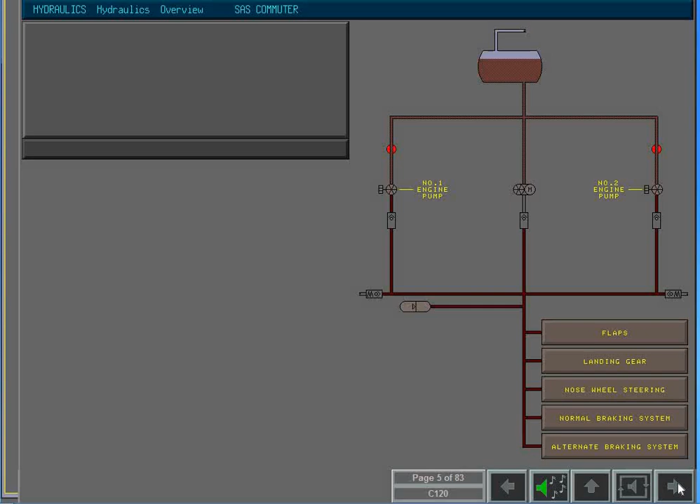The Fokker 50 is equipped with a single hydraulic system. The hydraulic system is pressurized to 3,000 pounds per square inch by 2 engine-driven pumps. The hydraulic system supplies hydraulic power to the flaps, the landing gear, the nose wheel steering, the normal braking system, and the alternate braking system.

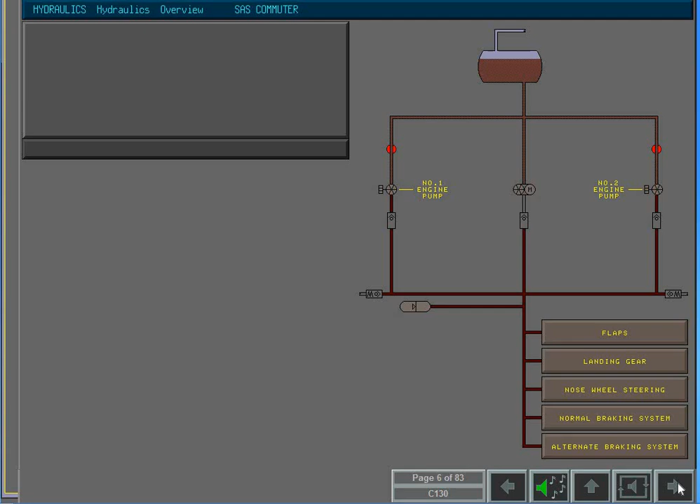The hydraulic fluid used is to specification MIL-H-5606. This fluid is red in color, fire resistant, and has an operating temperature range from -54 degrees Celsius to 135 degrees Celsius.

The engine-driven pumps are located on the propeller reduction gearboxes, the left engine-driven pump on the left gearbox, and the right engine-driven pump on the right gearbox. All other hydraulic system components are located in the hydraulic bay in the left nacelle tail cone. Hydraulic fluid is held in the hydraulic tank.

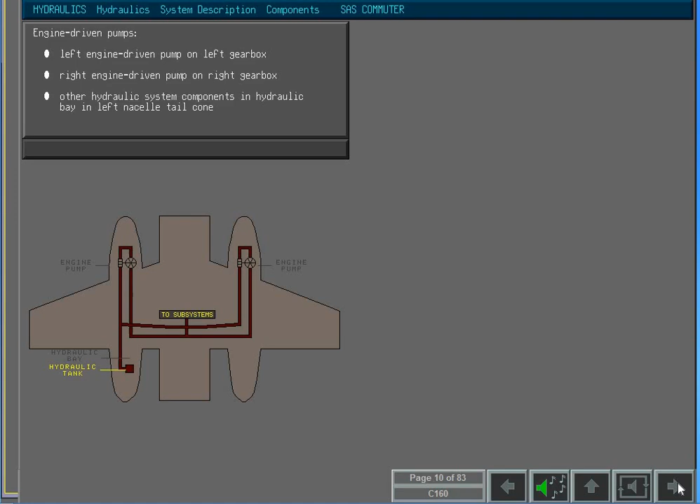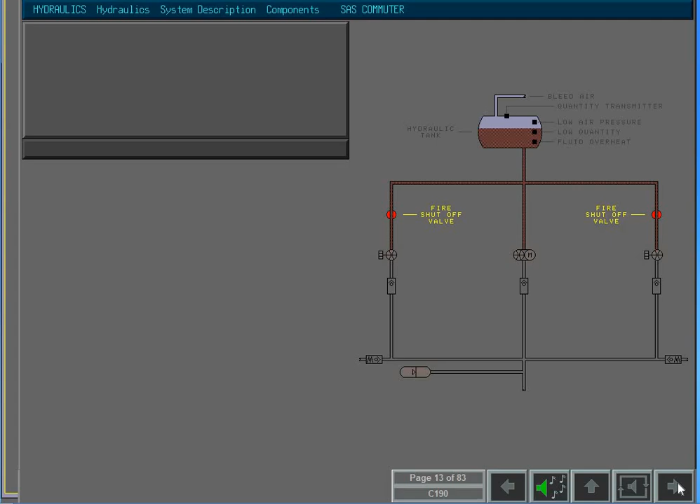The hydraulic tank is pressurized with air from the bleed air system in order to prevent pump cavitation. The hydraulic tank is fitted with a low air pressure sensor, a hydraulic fluid overheat sensor, a low quantity sensor, and a quantity transmitter. The hydraulic fluid flows from the tank to the engine-driven pumps via fire shutoff valves.

The left and right fire shutoff valves are controlled by the respective fire handles located on the flight deck overhead panel. When a fire handle is pulled, the associated fire shutoff valve closes and the hydraulic fluid supply to the relevant engine-driven pump is cut off.

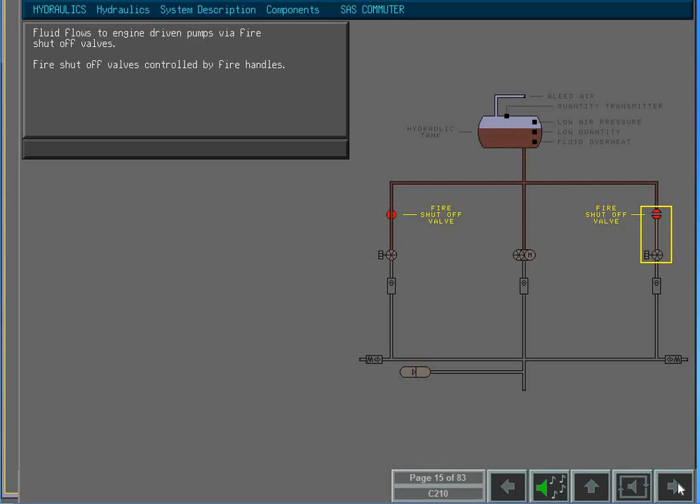The hydraulic fluid flows from the engine-driven pumps at a pressure of 3,000 psi via check valves to the hydraulic subsystems. Check valves are installed to prevent the reverse flow of hydraulic fluid. These valves ensure that fluid cannot flow from an operating pump to a non-operating pump. If one of the engine-driven pumps fails, the remaining pump can continue to pressurize the system to 3,000 psi and still meet system fluid requirements.

Pressure relief valves are installed downstream of the engine-driven pumps to protect the system against overpressure. These valves open when pressure is above 3,500 psi. A system accumulator keeps pump pulsation loads to a minimum.

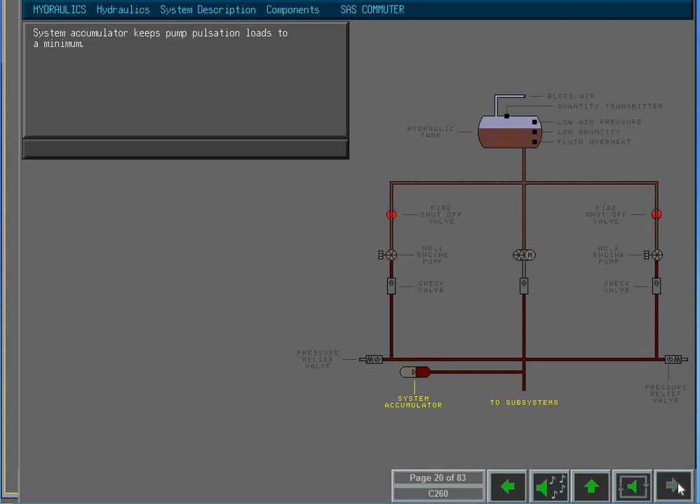Hydraulic fluid is supplied to the engine pumps via which of the following? Please touch the highlighted area. That's right.

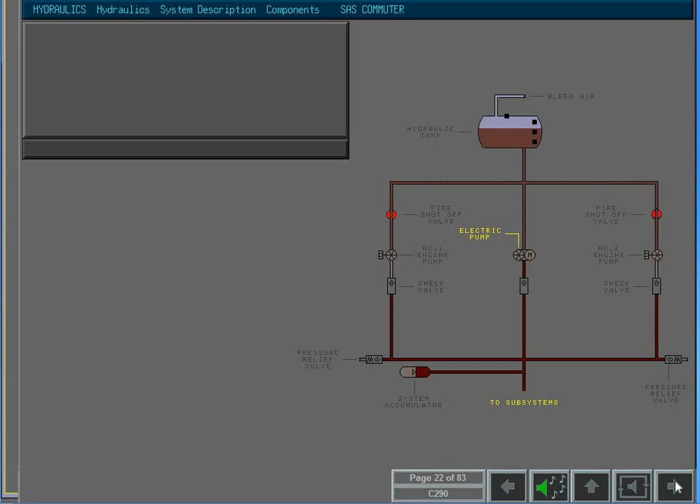In addition to the 2 engine-driven pumps, the hydraulic system can be pressurized by an electric pump. The electric pump is used by maintenance personnel for system testing and to pressurize the brake accumulators on the ground.

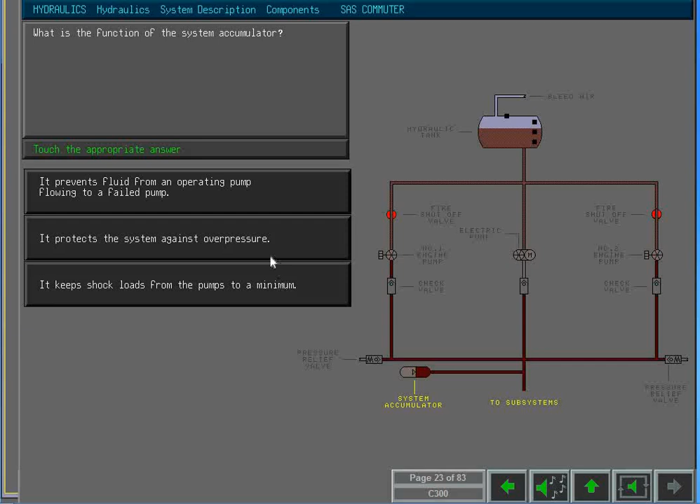To test your understanding of the system so far, which of the following describes the function of the system accumulator in the hydraulic system? Please touch the highlighted area. Yes. The hydraulic service panel is located in the hydraulic bay in the left nacelle tail cone.

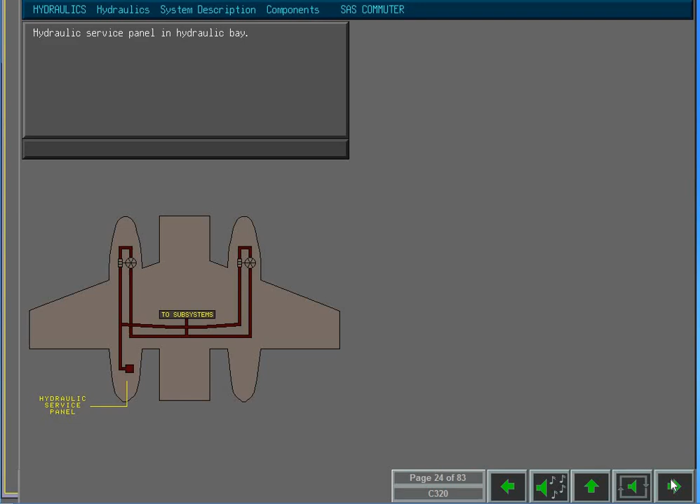The hydraulic system can be pressurized on the ground by connecting a test rig to the pressure and suction connections on the hydraulic service panel. This operation is carried out for maintenance purposes.

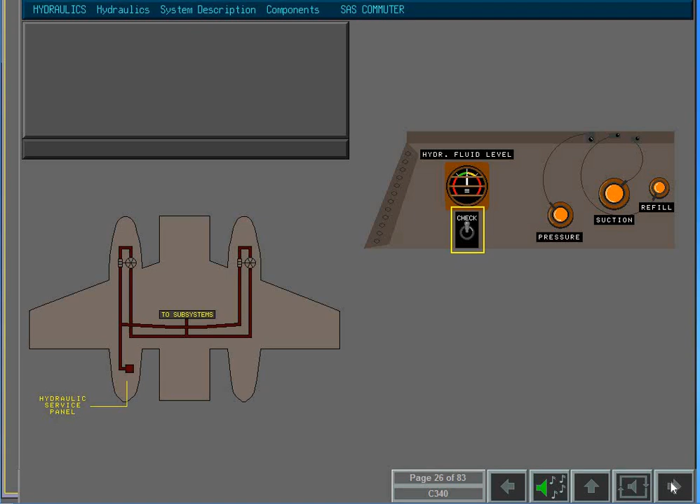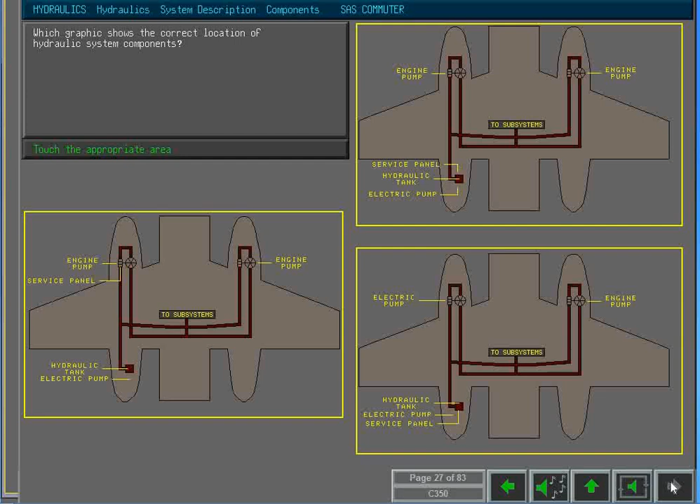A check switch is used to examine the quantity of fluid in the hydraulic tank during maintenance. When the check switch is used, the quantity indicators at the service panel are powered by the DC ground handling bus. Touch the option that shows the correct location of the main components of the hydraulic system. Please touch the highlighted area. That's right.

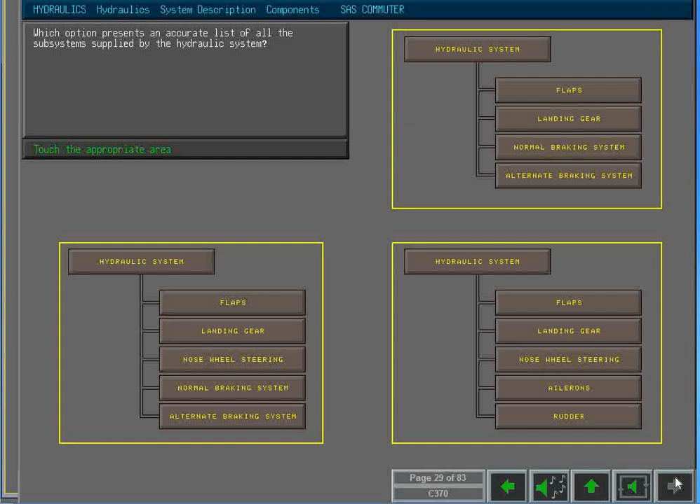To check your recall of information presented in the overview, touch the option that presents a complete and accurate list of the subsystems supplied by the hydraulic system. Yes.

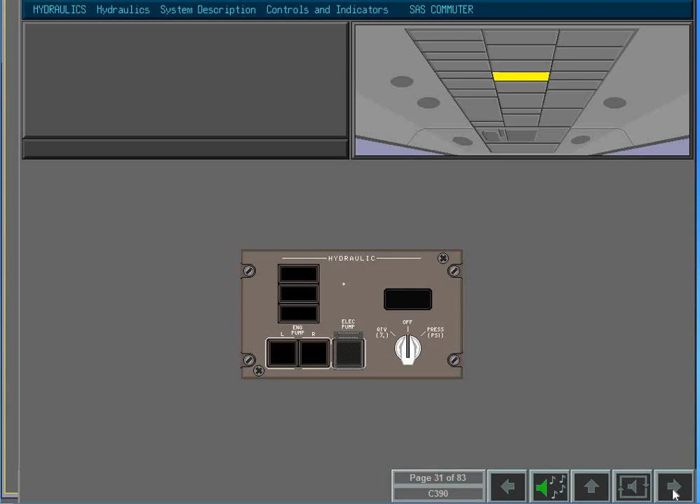Controls and indicators relating to the hydraulic system are located on the hydraulic control panel. The hydraulic control panel is located on the center overhead panel on the flight deck. The left and right engine pump push buttons are located on the bottom left of the hydraulic control panel. These push buttons control the left and right engine-driven pumps.

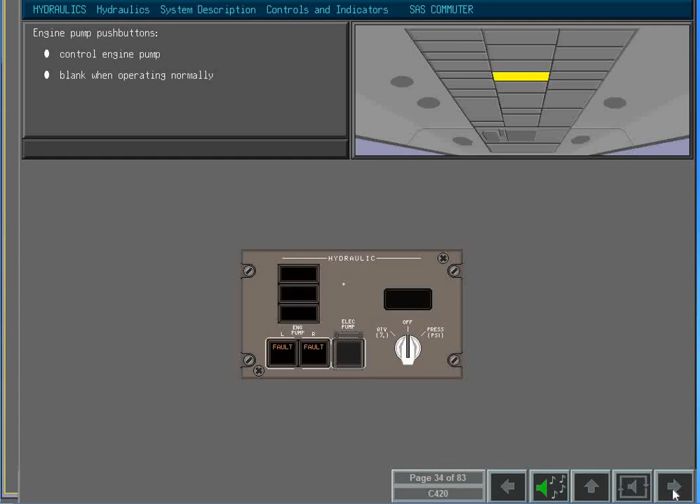The engine pump push buttons are blank when the relevant engine pump is operating normally. An amber fault light is displayed in the relevant pump push button if pump output pressure is low. A white off light indicates that an engine-driven pump has been switched off. The electric pump push button is located to the right of the engine pump push buttons. This push button is guarded and displays a white on light when the electric pump is switched on.

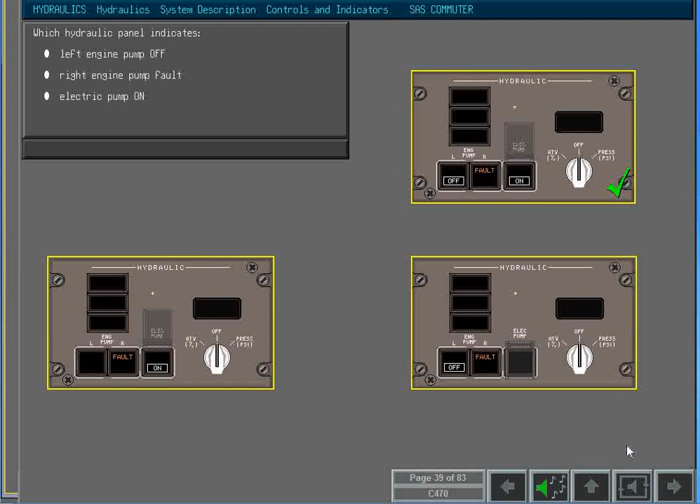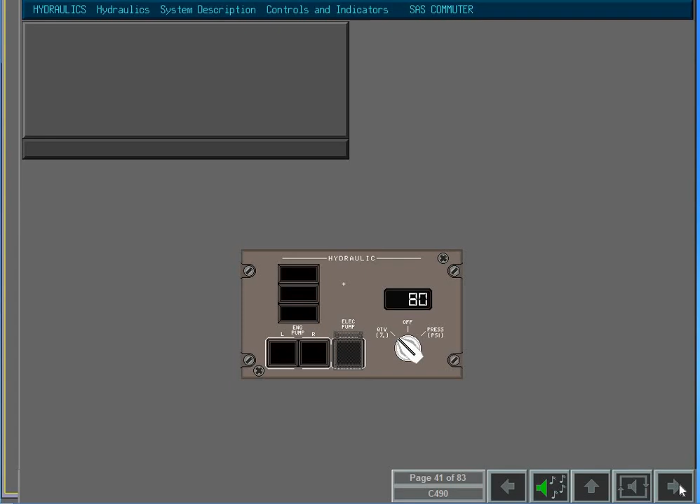Hydraulic fluid quantity and pressure are monitored using the rotary display selector and the digital display window. When the selector is in the quantity position, hydraulic fluid quantity is displayed as a percentage of hydraulic tank capacity.

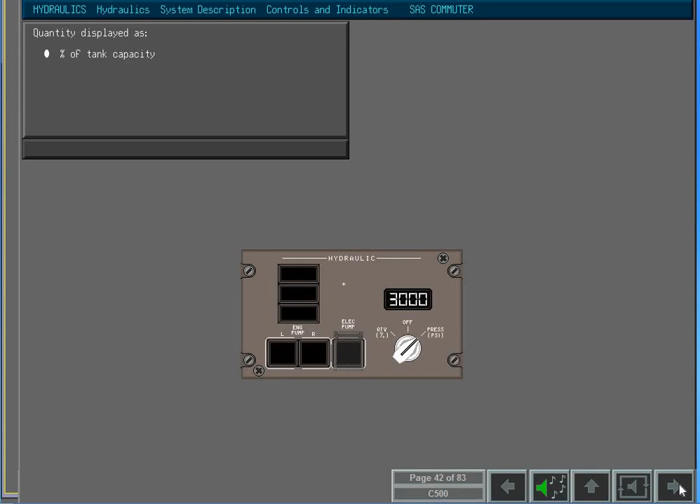When the selector is in the pressure position, the display shows the hydraulic system pressure in pounds per square inch. The electric power source for the pressure indication is DC bus 1 and for the quantity indication DC bus 2. The amber lights above the engine pump push button come on to indicate low fluid quantity, fluid overheat, or low tank air pressure.

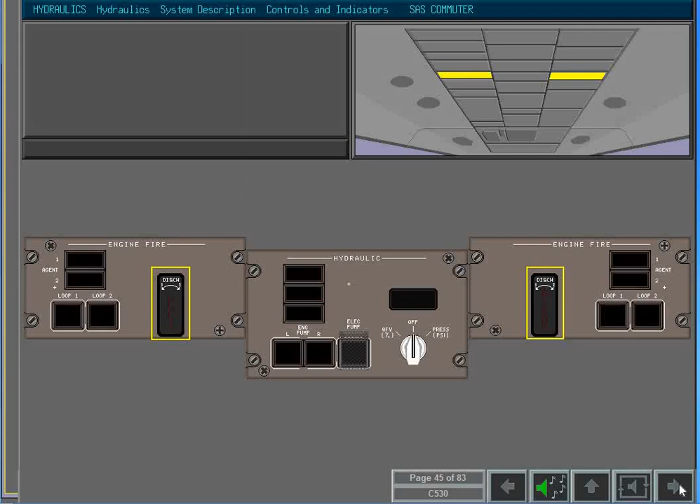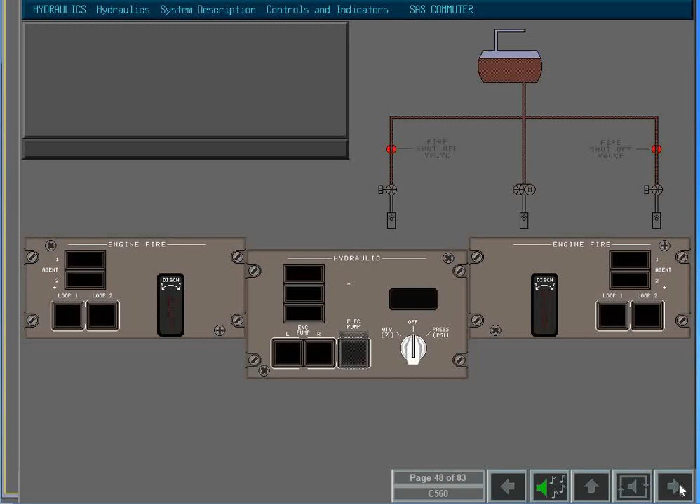The fire handles are located on the overhead panel in the flight deck on either side of the hydraulic control panel. The fire shut-off valves are opened and closed by the fire handles. A fire shut-off valve closes when its associated fire handle is pulled and opens when the fire handle is returned to its normal position. The electric power source for opening and closing the fire shut-off valves is the respective emergency DC bus.

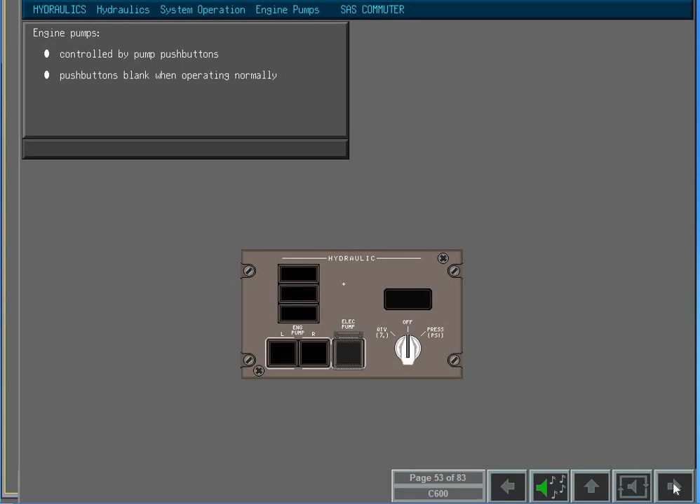The operation of the two engine-driven pumps is controlled by the left and right engine pump push buttons. When the engine pumps are operating normally, the associated pump push buttons are blank. Carry out the necessary action to switch on the left engine pump. Both engine pumps are now on. When an engine pump push button is switched off, the white off light is displayed. Although no pressure is supplied, the associated pump is still driven by the engine and is fluid lubricated.

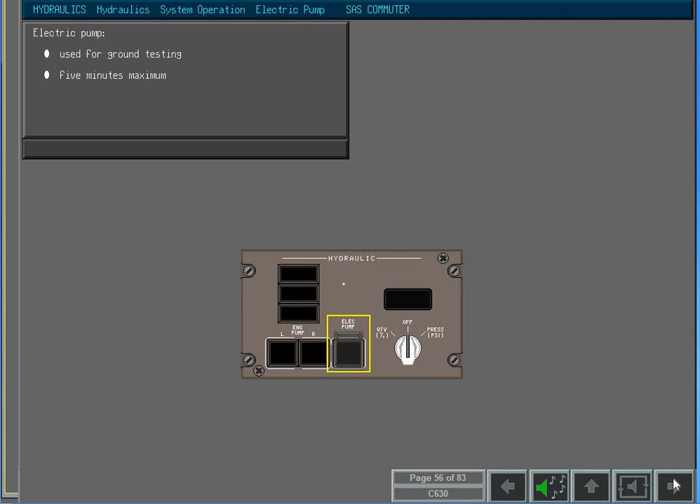The electric pump is used by maintenance personnel to make ground checks and can be operated up to 5 minutes maximum. The operation of the electric pump is controlled by a guarded push button on the hydraulic control panel. Carry out the procedure to switch on the electric pump. Complete the procedure. Note that the white on light monitors the push button position and not the pump operation.

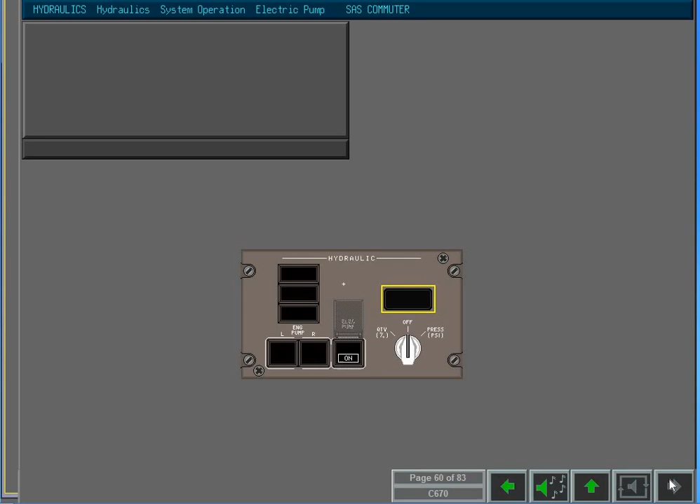There are no fault indicators in the electric pump push button. The pump can, therefore, only be monitored for correct operation by the pressure display indicator. Check the hydraulic pressure generated by the electric pump. Having checked the pressure, the selector is returned to the off position. Complete the procedure. That's right.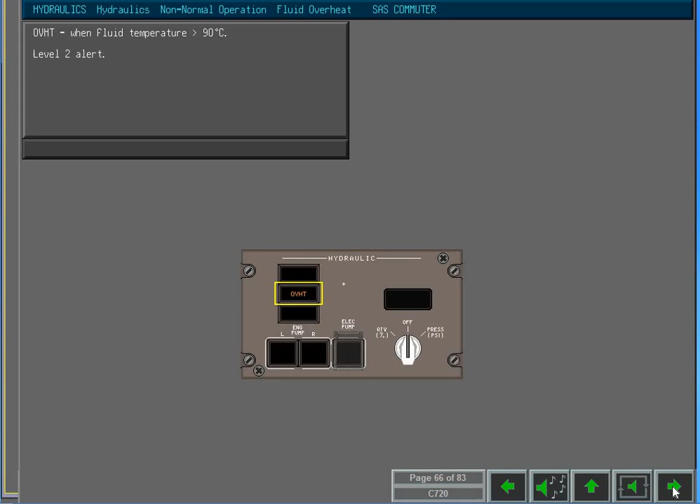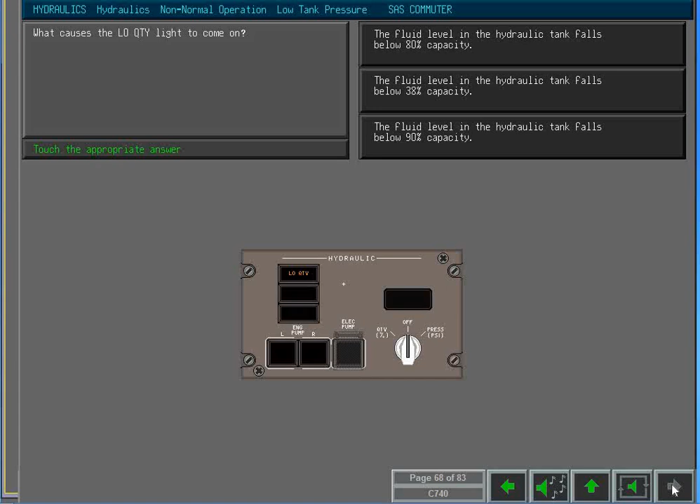When the air pressure in the hydraulic tank is below 15 psi, the amber tank pressure light will come on. Low tank pressure causes a level 2 alert. Which of these conditions causes the low quantity light on the hydraulic control panel to come on? Please touch the highlighted yes. Which of these conditions causes the overheat light on the hydraulic control panel to come on? Please touch the highlighted. That's right.

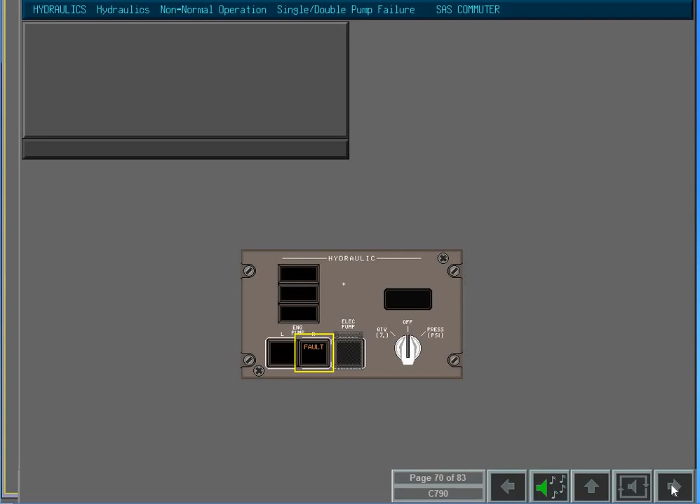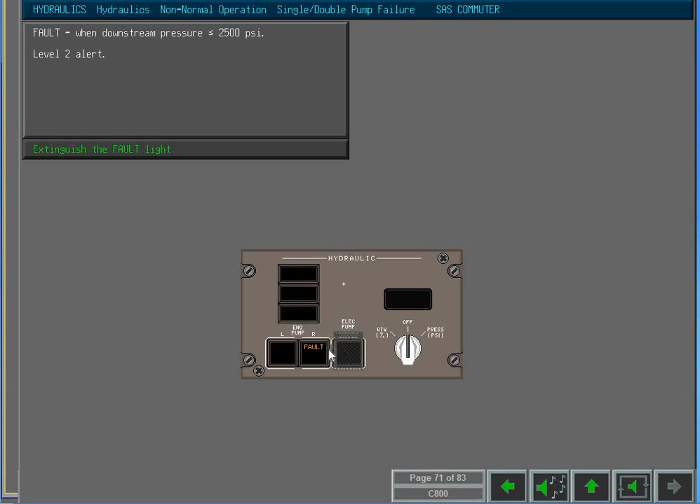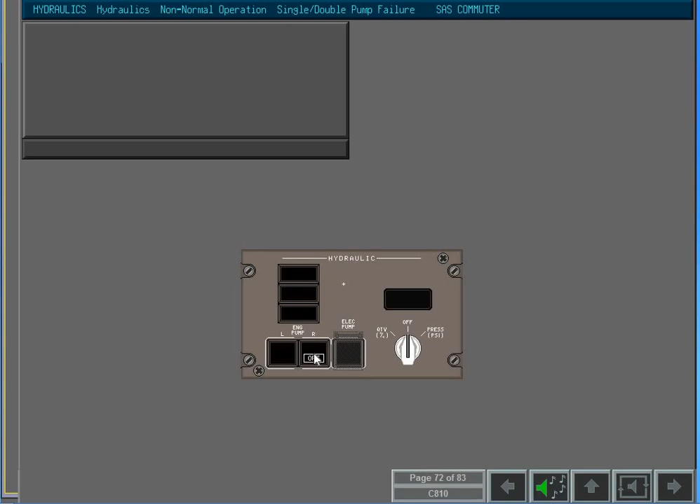When downstream pressure from an engine pump falls to 2,500 psi, an amber fault light appears in the associated engine pump push button. Low pressure causes a level 2 alert. When the engine pump push button is switched off, the fault light is extinguished and the off light illuminates. Extinguish the fault light in the right engine push button. The fault light is inhibited when the aircraft is in takeoff mode, or the associated engine is shut down, or the push button is off with the white off light displayed, or the associated fire handle is pulled.

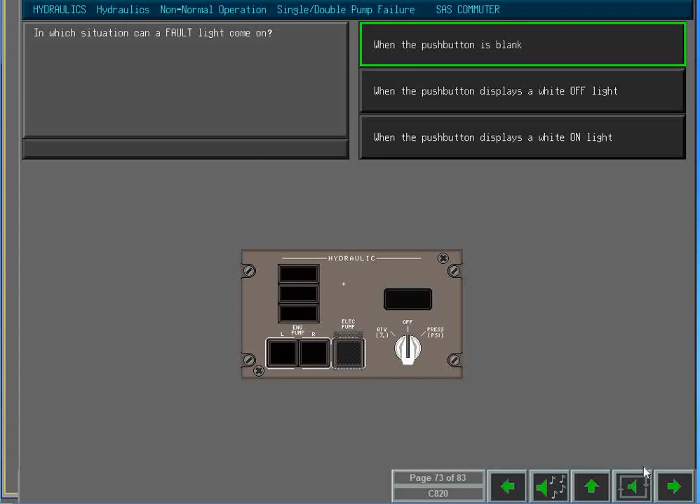In which of the following situations is it possible for a fault light to come on in the engine pump push buttons? Yes. The hydraulic system light comes on at the central annunciator panel if the integrated alert system is operating in backup mode and both engine pumps fail, or both engine pumps are switched off.

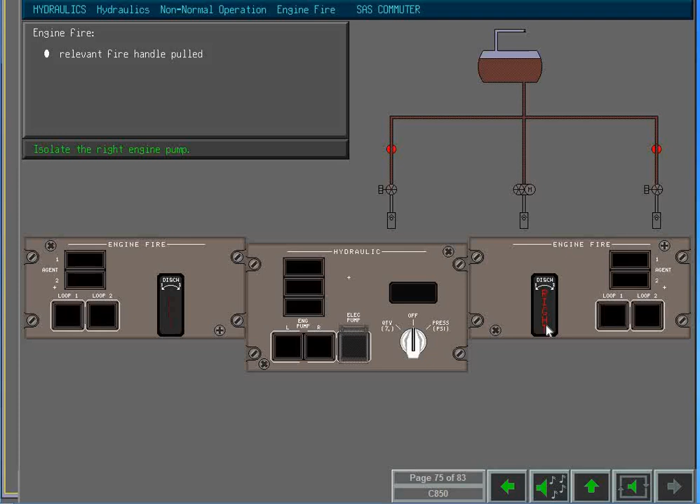In the event of an engine fire, the relevant fire handle is pulled. Assume the right engine is on fire. Isolate the right engine pump. Pulling the fire handle causes the fire shut-off valve to close and the hydraulic supply to the affected engine to be cut off. However, the relevant fault light does not come on as it is inhibited. The affected engine pump dry runs and subsequently has to be replaced.

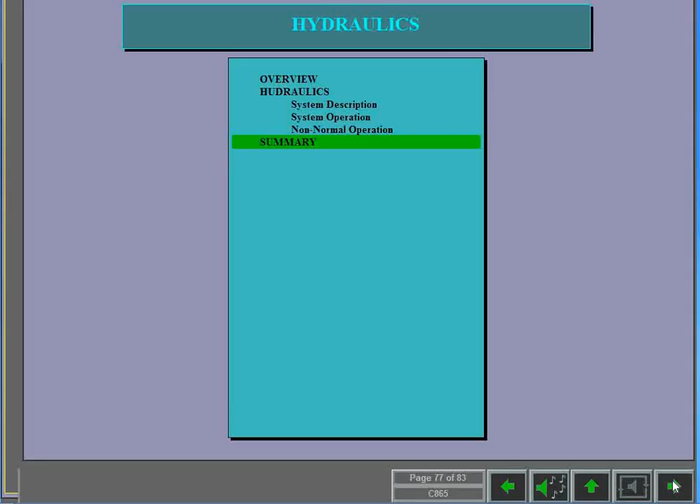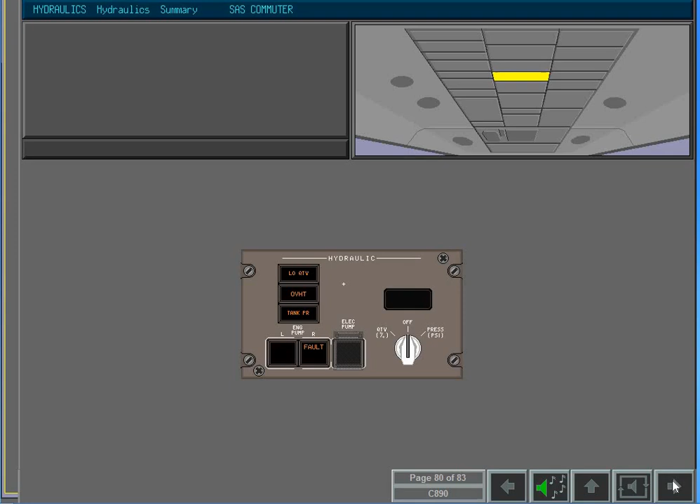Hydraulic power is supplied by two engine pumps to the flaps, the landing gear, the nose wheel steering, the normal braking system, and the alternate braking system. The operation of the hydraulic system is monitored automatically and relevant indications are displayed on the hydraulic control panel. Pilot intervention is only required in non-normal situations of low fluid quantity, fluid overheat, low tank pressure, pump faults, and engine fire. In the event of an engine fire or failure, the affected system should be isolated. A single engine pump is sufficient for normal operation.